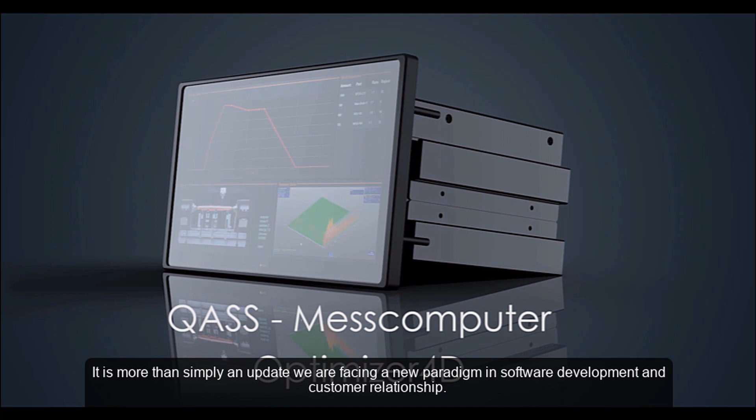Okay, welcome everybody. Today we want to present our completely revised software. It is more than simply an update. We are facing a new paradigm in software development and customer relationship. The very special last months gave us the chance to finish many developments and achieve a new type of measuring devices. Let's try to explain it.

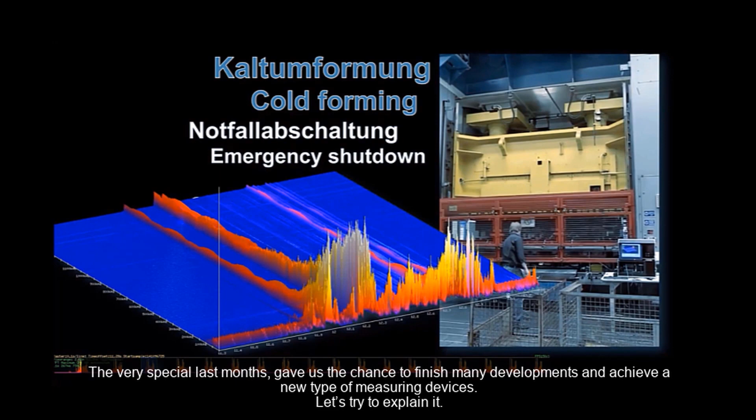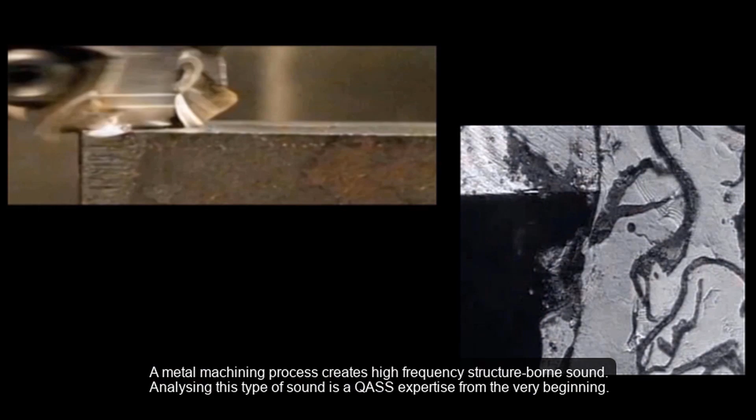A big and loud production machine produces a lot of pressure and internal sound waves. A metal machining process creates high-frequency, structure-borne sound. Analyzing this type of sound is a QASS expertise from the very beginning. We try to understand what is going on inside of machines and materials.

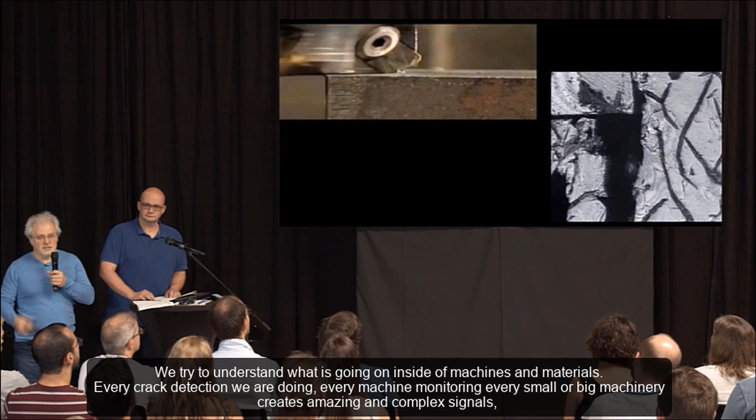Every crack detection we are doing, every machine monitoring, every small or big machinery creates amazing and complex signals. We call it information. Information that we have to interpret, to understand. We were frontiers using high-speed spectral analysis in production environments.

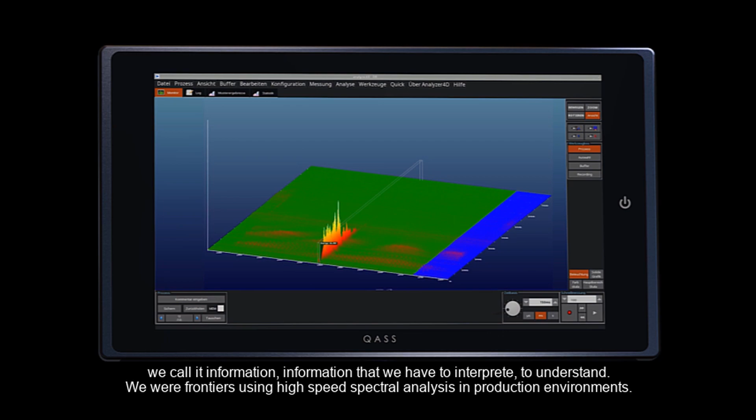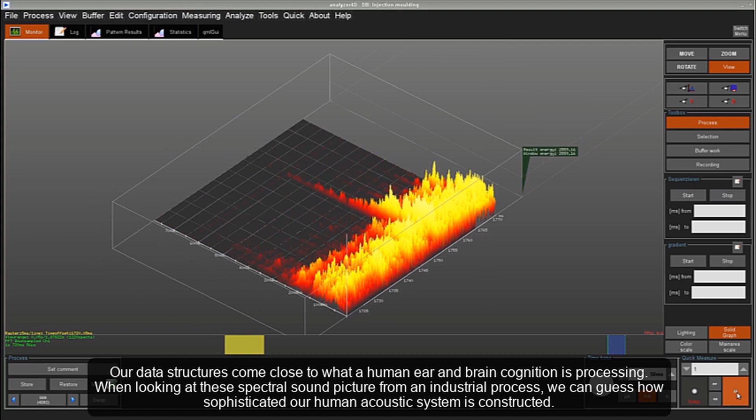Now our data structures come close to what a human ear and brain cognition is processing. When looking at these spectral sound pictures from an industrial process, we can guess how sophisticated our human acoustic system is constructed. We try to draft our measurement technology like our human brain.

The idea was to have a universal measuring instrument that is extremely versatile, that is capable of learning, that is multifaceted, and that can deal with all the inputs from the environment. So we have sensors, ears, feelings, fingertips, eyes, etc. Similar sensors are found in the industrial environment, in the machine environment everywhere.

Sensors that provide information, and then we always reach the exciting point. What do you do with this sensory information? How to evaluate? How to get the meaning? Sampling sound is not enough. Sound is the movement of air molecules, billions of them, but without intelligent analysis, this is completely senseless and seems completely pointless. So we need something behind it that gives meaning to all the multiple sensory inputs.

And in our case, that is our brain. It is an unbelievable miracle that this works at all and how easily we find our way around in our environment. Extremely demanding even for the most intelligent machines.

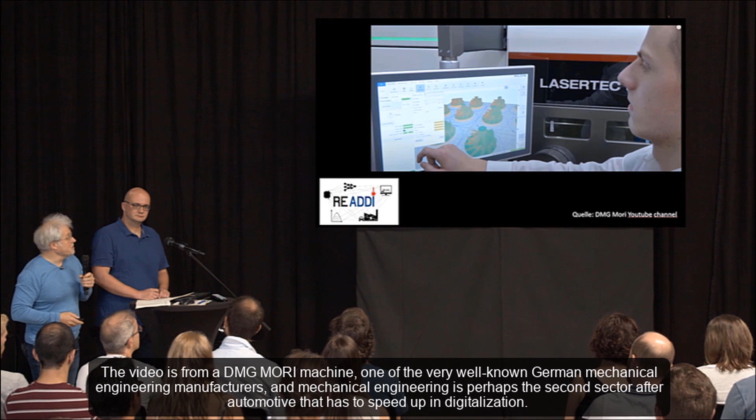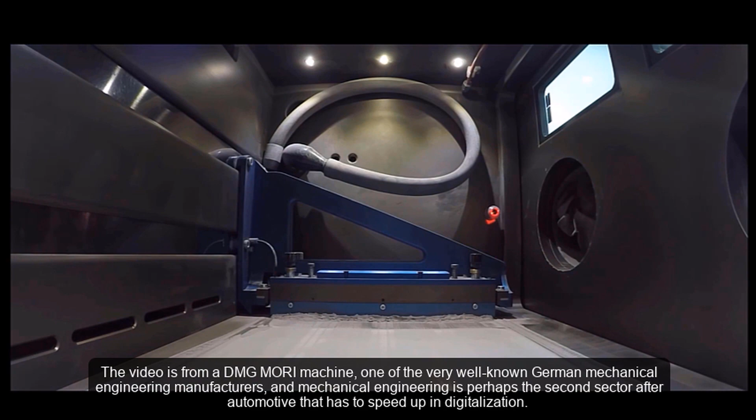The video is from a DMG Mori machine, one of the well-known German mechanical engineering manufacturers. And mechanical engineering is perhaps the second sector after automotive that has to speed up in digitalization. 3D printing technology is being addressed in more and more traditional companies. We are in the project together with DMG Mori and are working on the sensory analysis of these 3D printing processes.

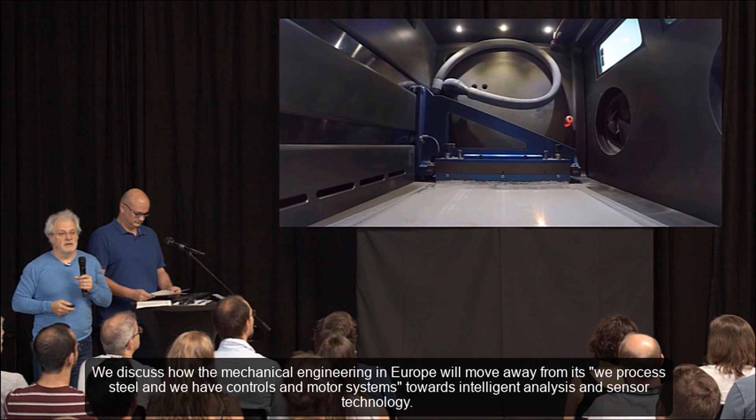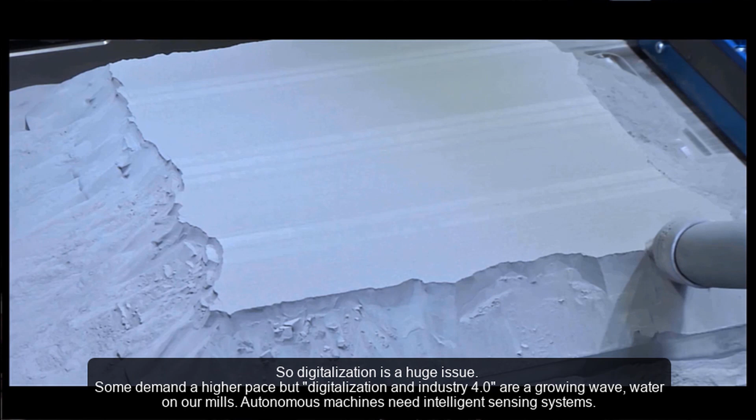We discuss how the mechanical engineering in Europe will move away from its "we process steel and we have controls and motor systems" towards intelligent analysis and sensor technology. So digitalization is a huge issue. Some demand a higher pace, but digitalization and Industry 4.0 are a growing wave. Water on our mills. Autonomous machines need intelligent sensing systems.

We have built visualization tools into the software. This is perhaps a little bit beyond what is done in most sensor systems. So we can always understand which data we see and adjust the measuring parameters optimally to the machine. Also, the human-machine interface was always very important to us. For a completely autonomous system, you can perhaps leave that out, but in the phase up to that point, it's absolutely necessary.

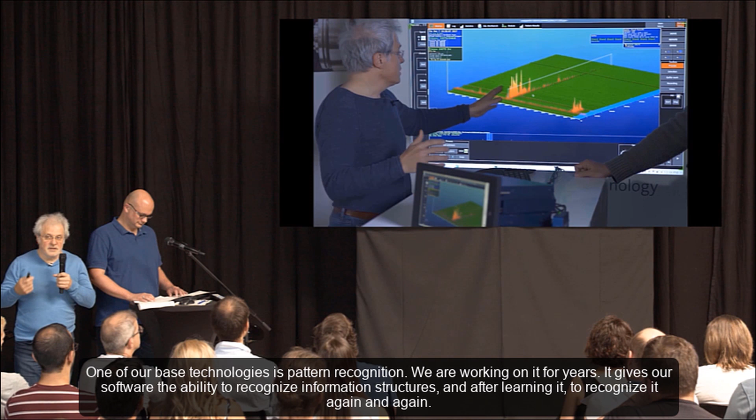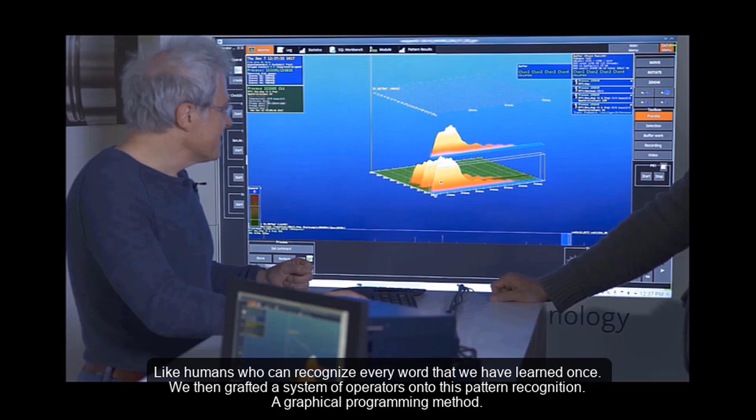One of our base technologies is pattern recognition. We have been working on it for years. It gives our software the ability to recognize information structures, and after learning them, to recognize them again and again. Like humans, who can recognize every word that we've learned once. We then grafted a system of operators onto this pattern recognition, a graphical programming method.

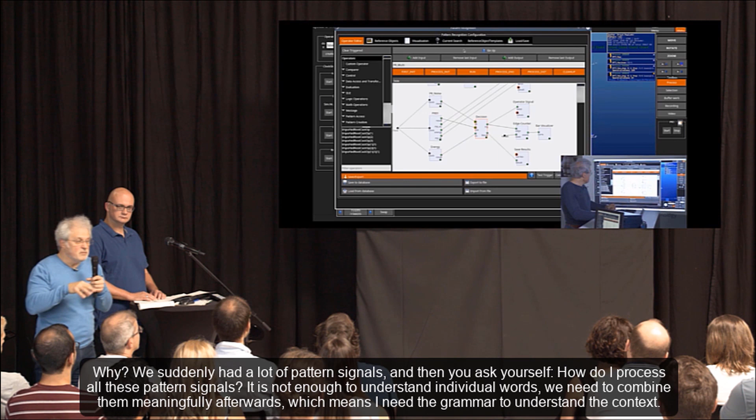Why? We suddenly had a lot of pattern signals. And then you ask yourself, how do I process all these pattern signals? It's not enough to understand individual words. We need to combine them meaningfully afterwards, which means I need the grammar to understand the context. Then we can read sentences, stories, maybe books. So we are developing the method to work with the learned patterns.

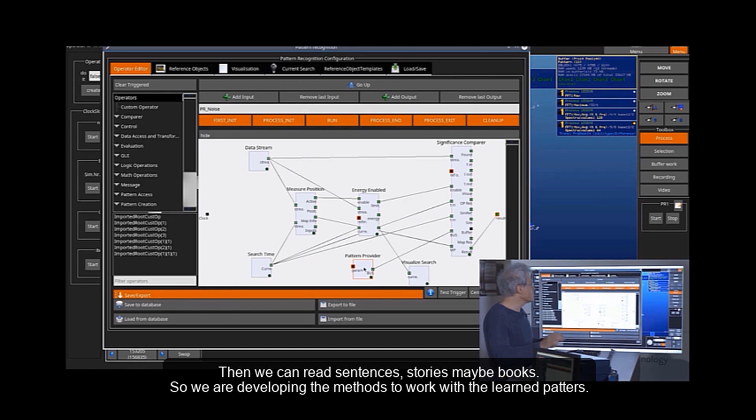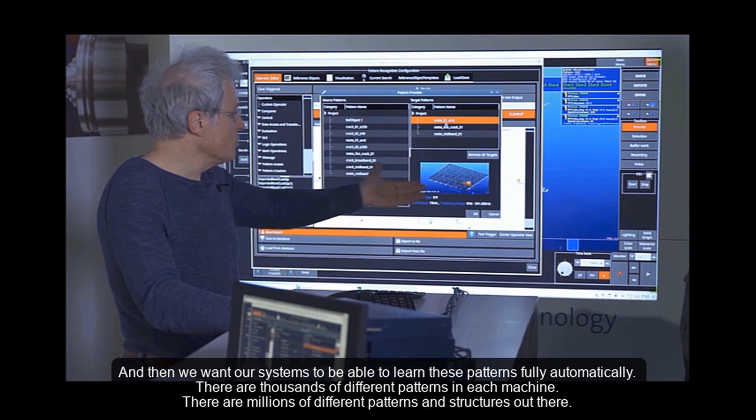We now implemented types of signal clustering. That means we are trying to make sense of the patterns in a fully automated way, trying to figure out structures of emissions and sounds like different words and terms. And then we recognize them very quickly and store them in a library in the system, making our systems work and learn faster and more automatically.

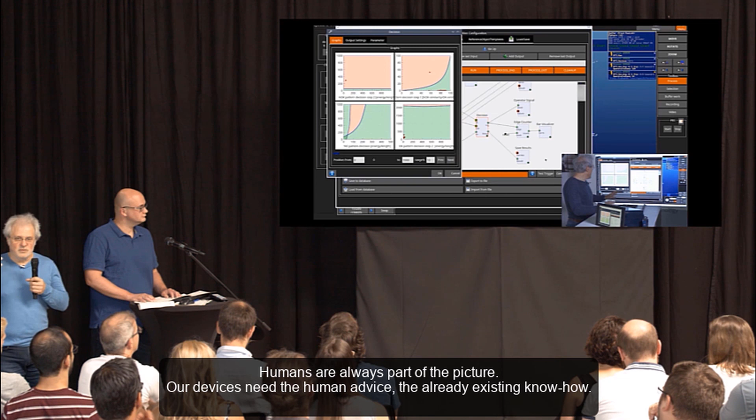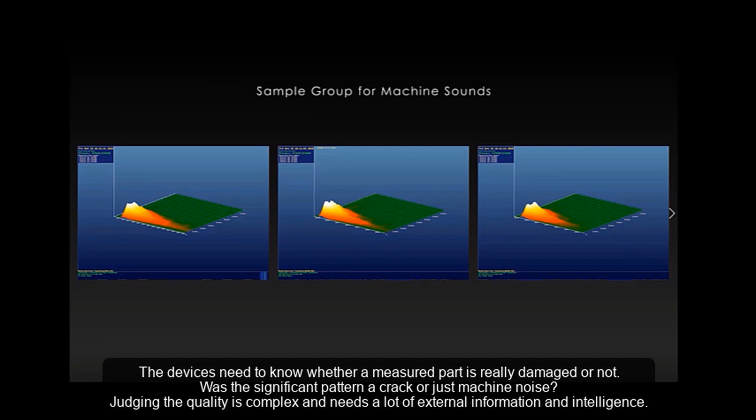Humans are always part of the picture. Our devices need the human advice, the already existing know-how. The devices need to know whether a measured part is really damaged or not. Was this significant pattern a crack or just machine noise? Judging the quality is complex and needs a lot of external information and intelligence. Our systems require human input. We call it human confirmation, to learn in the right way.

Okay, what we did. We scanned signals very quickly, did spectral analysis. We filtered the data, we recognized patterns, we collected and classified patterns. We can use operators to process the patterns together very quickly and analyze processes. With higher abilities, new demands are rising. Because we naturally say, okay, we can do a lot now, customers respond, then just do it. But this process was time consuming.

We looked at the data, we analyzed the patterns, we clustered, we put a network of operators on top of it, and so on, everything elaborate. Not necessarily the speed you need. That is why we have added another accelerator in the last few months. We put in a scripting system. We used, trained and improved it in a number of workshops we held in the last months.

To us it is still astonishing. We developed one application prototype within 1 week. We held 4 workshops, we developed 4 applications. We took our QASS software and hardware construction kit and built one new application within 1 week.

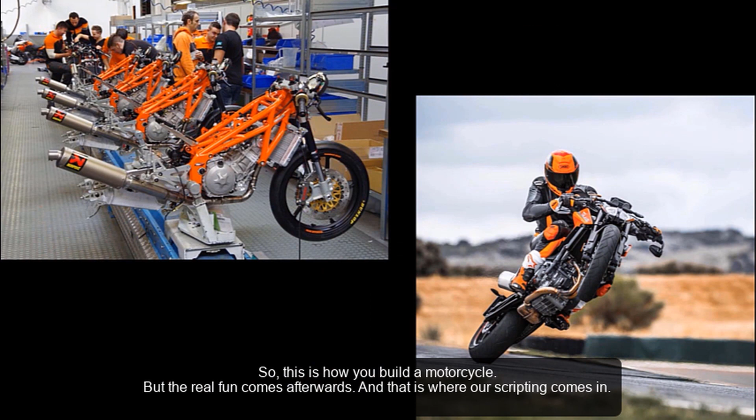But the real fun comes afterwards. And that is where our scripting comes in. It is about using base abilities in a very flexible and maybe even playful way. It uses all the technical features of the motorbike and then plans the tour and drives to the lakeshore on Sundays. We call it scripting. We use it to write a new application in no time at all. We use it to build applications we were not able to before.

These first 4 applications are already published on our website. In our workshops we deepened and tested the new method. Many QASS colleagues who have had nothing to do with programming before suddenly used scripting. Fortunately, it is easier to learn than C++, so we navigated quickly and easily through the data and built new applications.

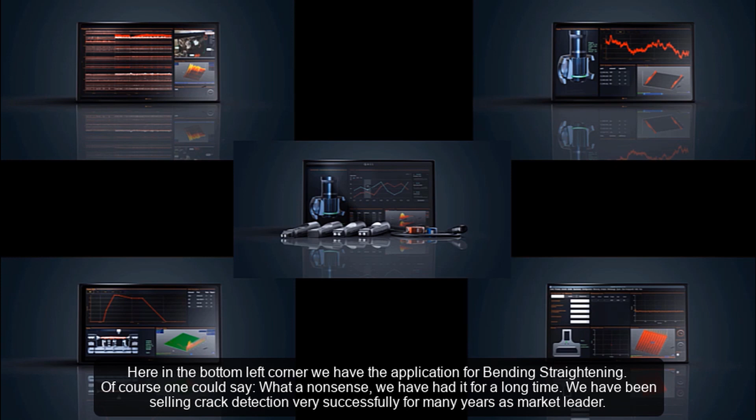Here in the bottom left corner we have the application for bending straightening. Of course, one could say, what a nonsense. We have had it for a long time. We have been selling crack detection very successfully for many years as market leader. But the market request was clear. Can you please make the user interface easier?

What QASS delivered became more and more complicated. We thought, understood, but there's no way around. We have to recognize patterns, we have to cluster data. You have to learn how. Now we built a simplified interface in a short time, which we couldn't in years with the old methods. The GUI worked after 1 week. The presented application was drafted in 2 weeks.

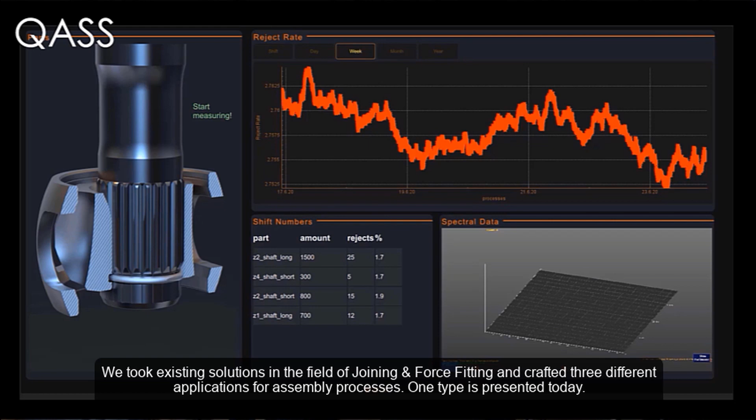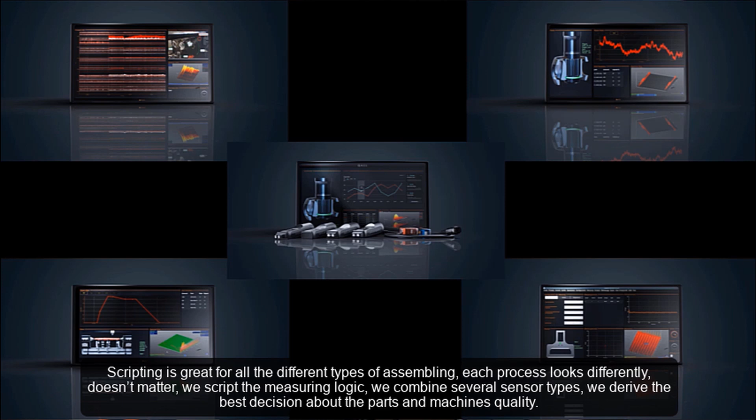But of course our straightening team had additional ideas, creates additional plugins. We took existing solutions in the field of joining and force fitting and crafted 3 different applications for assembly processes. One type will be presented today. Scripting is great for all the different types of assembling. Each process looks differently. Doesn't matter, we script the measuring logic, we combine several sensor types, we derive the best decision about the parts and machine's quality.

We created a brand new solution for plastic injection molding. The structure-borne acoustics transmits the information about tool behavior from the inside, in process. Using scripting logic, the team developed new algorithms to unveil the tool information. So we are introducing a brand new solution to the market. Last but not least, we applied the scripting to our micromagnetic field of applications. And the process of application development is ongoing.

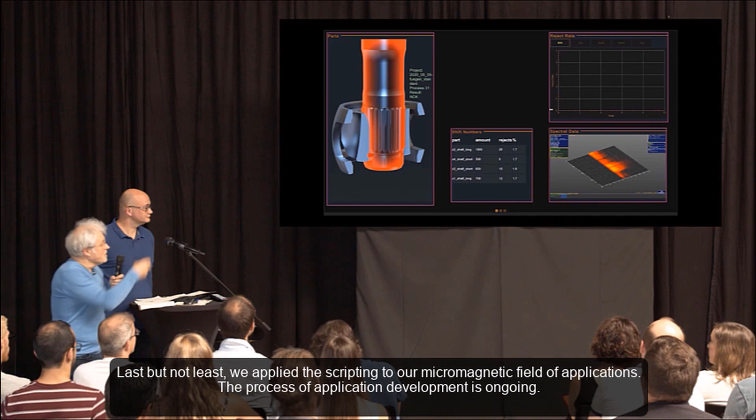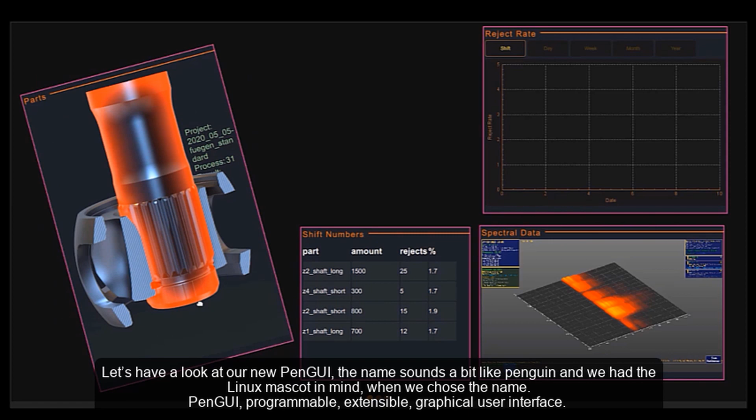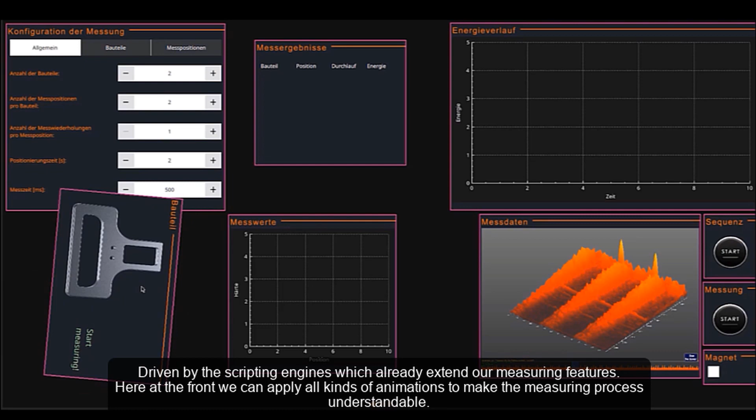Let's have a look at our PenGUI. The name sounds a bit like penguin, and we had the Linux mascot in mind when we chose that name. PenGUI: programmable, extensible, graphical user interface, driven by the scripting engines which already extend our measuring features. Here at the front we can apply all kinds of animations to make the measuring process understandable. Pictures, charts, listings, actuators. Everything is editable and can be used to present even complex data analysis in the simplest way. Machine operators will recognize their manufacturing process in the QASS analysis procedure.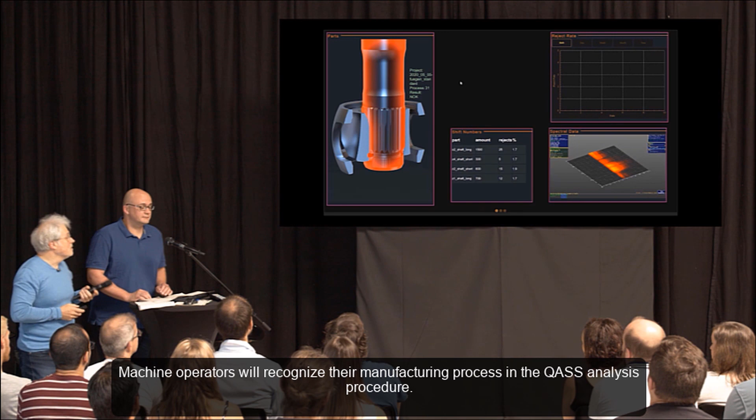In fact, we have created 2 interactive and customizable levels to which the user can contribute his ideas. The first one refers to scripting. Through scripting, the user can adapt measurement analysis as he likes, so the user will be able to access the basic functions of the measurement system, its framework, which we programmed in C++. We have made the system even more intelligent and practical regarding measurement analysis. And the second level refers to the graphical user interface. Also here the user can contribute his ideas, and at the same time he can access the functions that he has previously programmed. This means that access to complex data analysis becomes easier.

Okay, so we actually have a new approach. In fact, a paradigm shift. Where in the past, when we took on new projects, we needed a relatively long development time to really get an application ready, we would now work completely differently. It is the change of development speed, the ability to combine several types of sensors, the ability to script new algorithms, the ability to access the Python libraries and to show all results in a customized user interface. This all leads to a completely different kind of work at QASS.

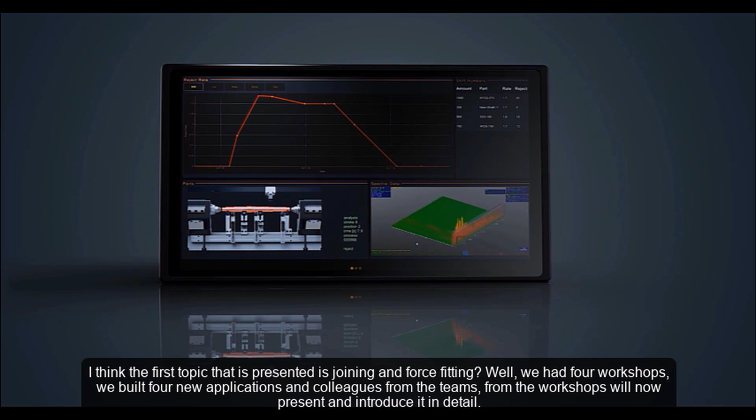Our new approach enables us to finish new projects within 8 weeks of QASS working time. Well-known manufacturing processes will take only hours or days of customizing. We will derive and offer a number of standardized applications from our newly developed apps. I think the first topic that is presented is joining and force fitting. Well, we had 4 workshops. We built 4 new applications, and colleagues from the teams from the workshops will now present and introduce it in detail.